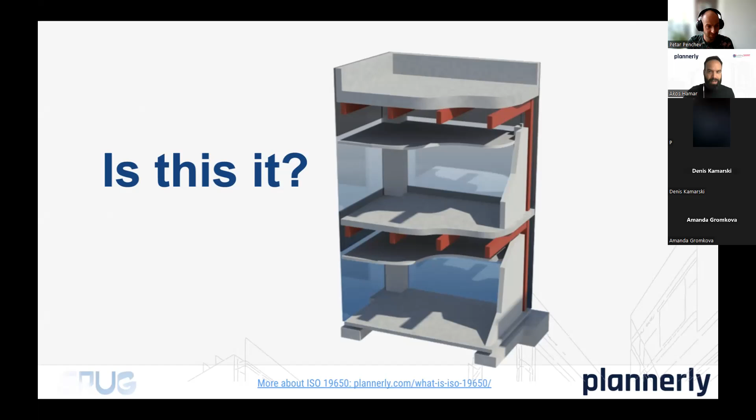What is BIM? What is BIM for you? Quickly going through it, because we have another article which talks about BIM for your grandma. How would you talk about BIM for your grandma? Maybe these are images from that article, not necessarily meant for you. But the question is, is it BIM? Of course it is BIM, but then is it another BIM? Is it better BIM? Is it worse BIM?

We could go on and show a couple of images with different geometrical aspects, but we can also assume different information going into it, different techniques, different ways of creating models. And if you put different personas on the screen as well, we know that BIM is different for everyone. An architect understands the BIM challenges in design development differently than, for example, an owner who is requesting the BIM. And that is what we believe is a main challenge to start with, because we are still not necessarily speaking the same language.

So a requirement coming from an organization for whom BIM is not their daily business, conveyed to an architect who is doing design using BIM software and technologies, then of course there is a gap in between and potential misunderstanding.

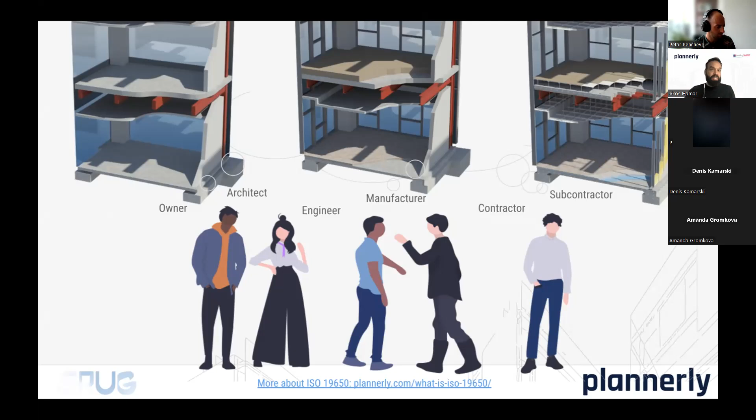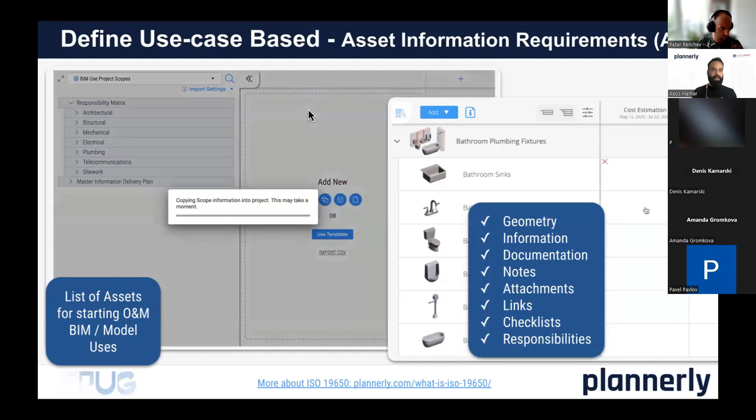That's the text-based portion of the tender process we are going through. We can also talk about building information modeling, which is an object-oriented database in the end, so we can talk about structured data and requesting information in a structured manner. For that, we are creating these responsibility matrices.

In such matrices, we can start requesting information for the given use cases. Because we are at the very beginning of the process, we can talk about our project on a higher level, on the different assets we are going to request, and start assembling the asset information requirement documentation. This is now more of a table structure where we can put all our requirements in a hierarchy and list the different use cases, if we have different use cases that we want to think about from the very beginning of the project.

We can stay on a very high level because remember, we are at the very beginning of the process, but important pieces of information that we are going to request, important aspects can already be discussed here, even going down into the details of information requirements. What are we going to expect for sure from the project at a given point in time?

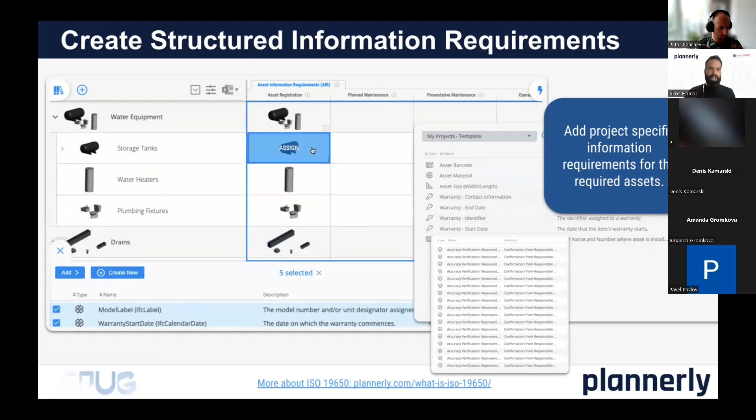So talking about the tendering process, we have our requirements and we can start inviting our collaborators. We have a nice function in the platform to invite teams, prospective teams, who don't see anything except the documentation that you share with them. So you can have multiple prospective teams - it really supports a tendering idea. In the end, they send back the information to you in the same structure, so you can compare apple to apple - really easy to decide who to work with.

So that was very quickly finding out that you need the project, creating it as an appointing party. Maybe it's not relevant for everyone - if you are a supplier of information, a designer, in a perfect world you should be receiving these invitations for tendering. But if you are representing an appointing party, a customer, these are the documents that are going to be put together in the very beginning to create the EIR, which in the end is going to be the invitation to tender.

In the next step, we assemble together a tender response and go through the appointment process. The tender response is the main document we all know as the execution plan. In the execution plan, we answer the challenges, questions and requirements that we received in the EIR documentation, and start adding more information into it, like mobilization - how are we going to mobilize our resources, human resources or software, hardware? How are we going to fulfill the requirements? Also, what kind of risk can we identify, and how are we going to mitigate those risks? So that's our tender response.

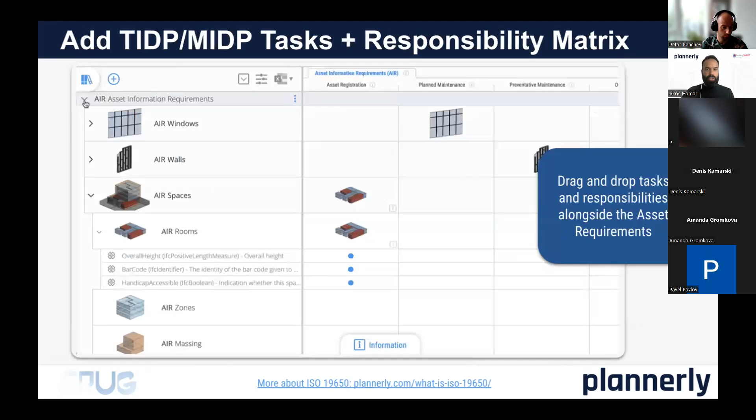You've already seen this kind of table user interface - that's our scope module, where you can start detailing out who is doing what at a certain point in time, for what kind of reasons. So another motto that we have: the right BIM at the right time, by the right people, for the right reasons. That's what we create here - the right requirements, really making sure everyone understands why we are doing BIM, how this BIM is going to be used downstream. And we can really talk about all the details needed - about the geometrical needs, about responsibilities, about information requirements, and so on.

Maybe it's a better picture about that - so we are going to create information containers that really call out all the details, and templatized in a manner meaning that you have a template you can reuse from project to project, but also customizable on each and every project, so you can really agree with all the project stakeholders about the principles.

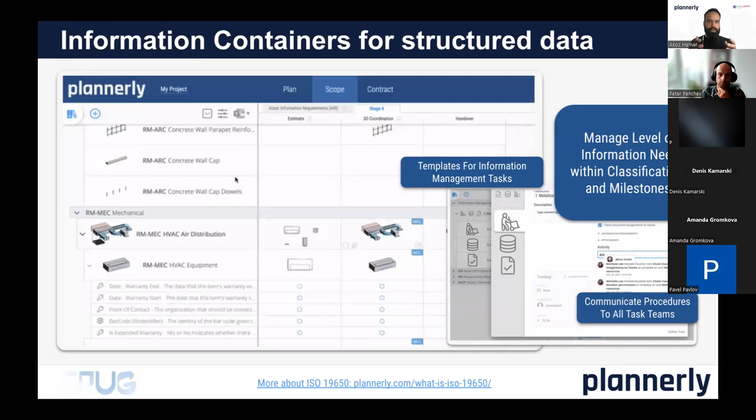I want to pause here for a second and just try to reiterate and rephrase what I'm saying, because I stated that one of the big problems we see in the industry is miscommunication - not necessarily understanding what is needed for a project, not necessarily understanding why we are doing information management or BIM on a project. In many cases, we also see that the appointing party is not necessarily in a position to fulfill their role - they have different business objectives, different from running a BIM project. Therefore, they might be challenged to be requesting the right information. And if that's unknown, if they cannot request the information for the purpose, then of course the suppliers, the designers, the contractors cannot deliver that information.

So I find this part very crucial. I believe we could spend all day just discussing it. This is the crucial part, to make sure that everyone really understands why we are doing BIM, how it is going to be used, and who has to deliver what at a given point in time. After that, it's a piece of cake to create a contract out of it.

Again, assuming we use Plannerly, we have some preset outputs that you can rely on, even having e-signatures in the application. So if you follow a formal process, you can even get as far as getting electronic ink on the paper and have a green light to get started.

This was whatever I told about, the creation of the agreement. Again, I cannot emphasize enough how important it is. Once we have these agreements, we can jump into the collaborative information production, so to the modeling pretty much.

When we do that, we probably want to agree on timing. So creating a Gantt schedule, as we typically do, or any kind of timing approaches or plans, can be done using Plannerly. There is an easy way to do that, because each and every requirement that you created, each and every information container, is translated into a task, which can have a dependency and a duration. So you can really start scheduling the activities.

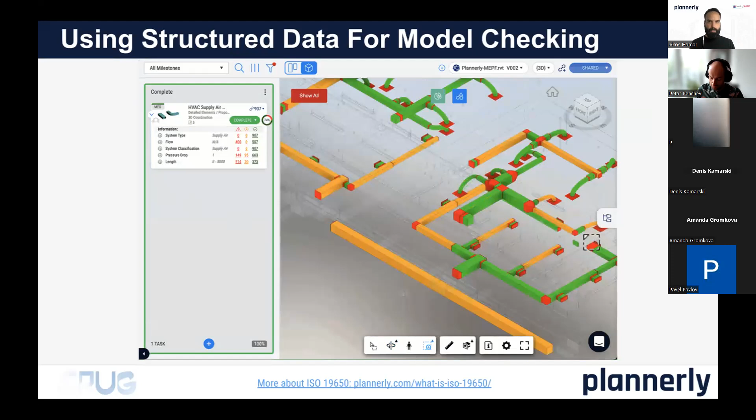I was talking about structured data. Structured data is again key in our BIM world. This structured data is created as a starting point inside of Plannerly, but doesn't stay inside of Plannerly, because otherwise it wouldn't be a great help. There are lots of tools out there that you are using for creating information.

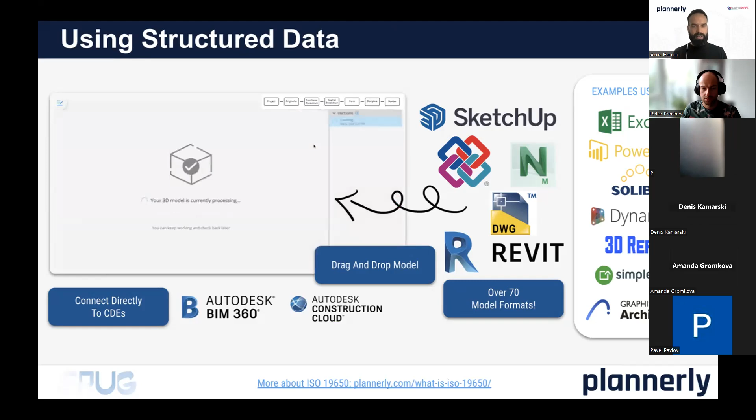Talking to a Revit group, most likely your preferred solution is going to be Revit. But if you want to visualize with Power BI or other tools, or do quality checking in different tools, you have to hand over the structured data for the next process step. We can do that in different ways, but one way that's taking off is relatively new—I think it was officially announced just a month ago or so, even though it's been in development for a long time now.

That is the Information Delivery Specification, the IDS in short, coming from Building Smart. IDS defines how information has to be delivered. It's supposed to have a human readable version.

Something like our scope module where you can very easily communicate the requirements, but it does have a machine readable version as well. That's what we rely on at Plannerly, creating from your scope requirements a machine readable XML format that is sent out to all these different parties.

It's going to be used for either information creation or quality checking purposes outside of Plannerly. I will show you an add-on for Revit, because we have an external company in Germany developing an add-on that can capture the IDS coming from Plannerly and then create all the shared parameters in Revit. It really semi-automates, preparing everything for the user as much as possible to create good content without having to look around in different places to understand what the requirements are.

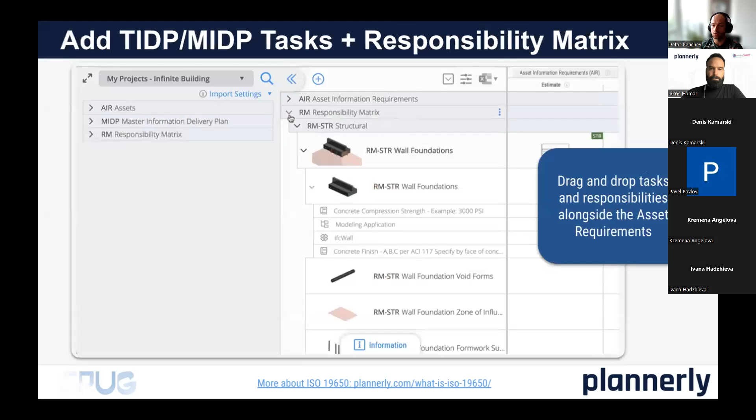So your best advice would be to explain everything in plain text. If we look at this through the prism of Revit, each element that needs to be modeled, or each category, should be listed, and for each category you should explain what's the level of information and level of geometry development that needs to be achieved. So there's no universal way - you should explain for each element how developed it should be, right? Something like that, yeah.

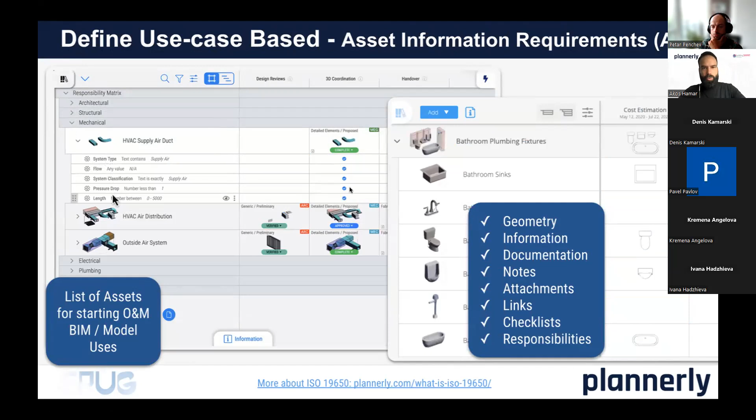So what you see in the background, that repeating short video - let me know if I can open it up bigger, which I will do. Let me leave the presentation slides and go to plannerly.com real quick. A website I would recommend to visit, join free, take a look at our resources, training, and so on. I'm going to go to the demo because there are some videos I'm not going to bore you with, but if I scroll down a little, I want to answer the question about explaining our needs.

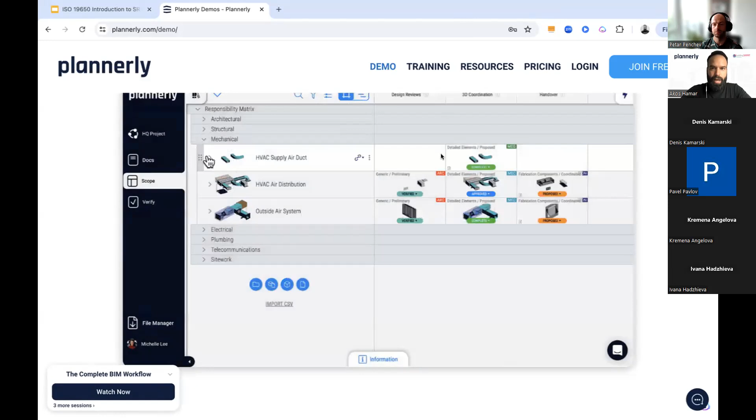Explaining the needs, especially when it comes to a level of information requirements, there is a trend - it used to be an LOI 2 or LOI 3. And what is that? Really not described. So for us, in the end, it has to be a Revit parameter anyway. What we believe in is to request that parameter from the very beginning, to define the different use cases.

So that's what you see on the horizontal axis - let's say I'm going to do a design review, a 3D coordination handover. It could be anything - quantity takeoff, scheduling, whatever you name it. For each and every use case, you might need different information. Different receiving applications are going to use the information, therefore you have to add something more and more potentially. But it has to be a Revit parameter anyway.

So why not define that requirement instead of saying it's an LOI 3 - defining the requirements in plain language. That's the information requirement you can see here, and then you can start requesting that for that element, for the given use case, I need this information. Now it doesn't have to happen on each and every project - you don't have to define it each time. We believe in using templates, as I mentioned earlier, so creating such templates is going to be reused from project to project and will define the requirements.

This is exactly what is going to be sent out into information delivery specification XML format that you can read in Revit, so you don't have to recreate the same thing in Revit because it's going to be there for you. And the same applies to geometry. Now you see the detailed elements as a geometrical requirement and proposed reliability. I cannot click on this one now because it's just a video, but if you click on it, you get a larger view better describing what it actually means. These are scales that let you move both the geometry and the reliability needs. This could be replaced with a number, but again, I'd suggest rather going with the textual plain explanation.

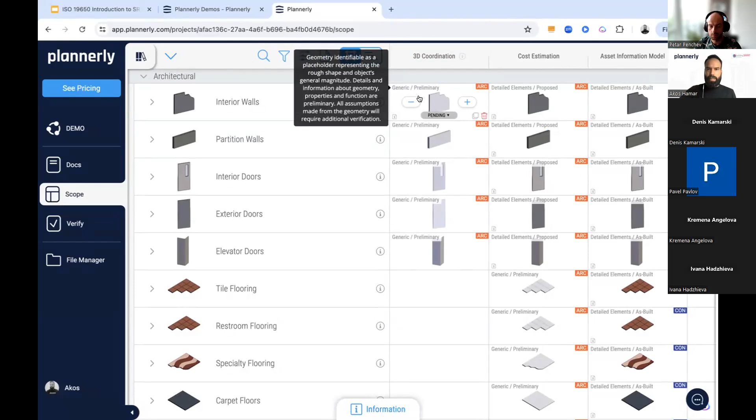I could change the setting, but it says something about the geometry. With the plus and minus signs, I can change it, and it suggests that there is some different information needed. If I click on it, yes, it is text information that will describe how to model, but we are putting it in a certain structure.

So the geometry is a combination of geometry and reliability, and you see it's a scale going from symbolic - you mentioned a box representation, for example - going to as detailed as a fabrication component. That's when you really start having the bolts, and there are steps in between.

The same applies to reliability. So from very early, not reliable at all, to as-built, and even defining the accuracy of that. So these two scales give you a structure to communicate the needs.

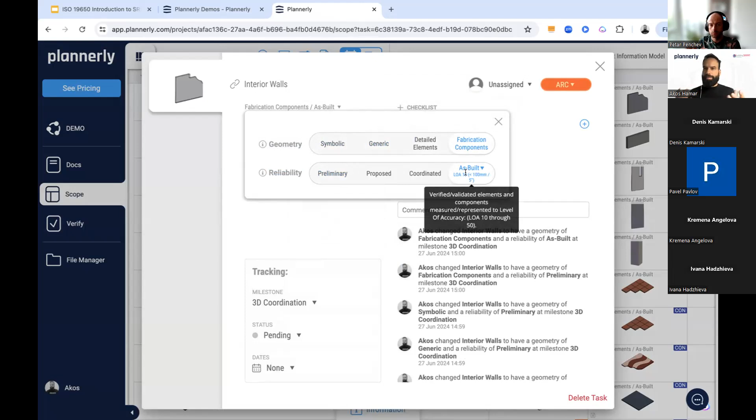You can find all the use cases. Like if you are in urban planning, just designing a mass of how a building is going to be placed, it's just a symbolic representation of a huge mass. But the accuracy has to be really at least coordinated, because you are talking about the space that you are going to use and the edges, and you have to meet the urban space requirements and so on. So that's one way.

Then you have the description. Maybe this is a place to describe your needs, and also we start having checklists as well. So an example that I see right away in my checklist is: all the stairs in this example have to be connected to the floors. That's something that I'm going to check.

But you could start adding anything like a 'not to model below' and so on. So this is a little bit more structured way of requesting data. Still, it's text information that you are going to enter there.

I was also wondering, based on your experience, do you know any published standards trying to cover this topic? Because the system you've shown, the geometry and reliability, the level of... can you go back? This one, yeah, the geometry and reliability - this is a system that you developed. You decided to do it in such a way, but it could be done differently. So are you familiar with any standards?

If I can talk about that for a second, we also started putting together something. We were actually invited to host this approach, which was between university and industry players, to start creating - do we have it somewhere here - methods of measurement. So methods of measurement, I quickly added to our project. This is something that you will also find in our templates. It starts talking about these exact geometrical challenges that we are facing typically on projects.

It doesn't cover everything. Moreover, it's an open approach. So if anyone is interested to contribute to that or join this approach, more than welcome.

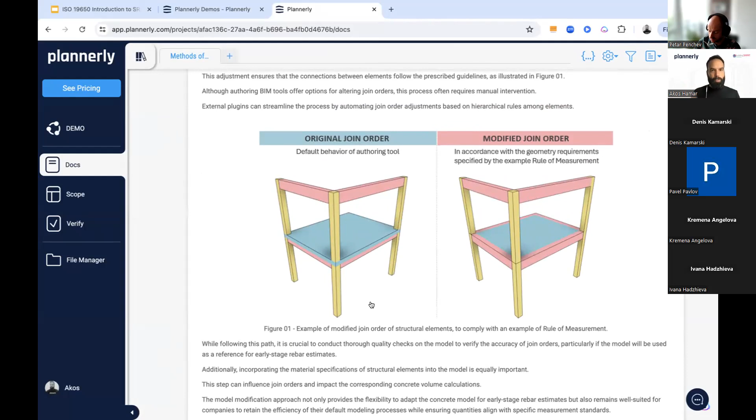So it starts defining how to model things. For the sake of this example, because it's a methods of measurement, we're keeping the quantification in focus, focusing on model creation and geometry from a quantification perspective. Again, this is a guideline, a kind of starting point for debate. But the feedback we get from the industry, from real big names, is that it's a good approach to have. Maybe also answering your question, because there was not a unified way of doing things, and this is attempting to bring everyone closer together.

So 17412, then maybe our guideline as well as a starting point. Okay, thank you very much.

We got another question here in the chat. Are you able to open the chat, or should I? Yeah, I can. I wanted to ask, did you find the question? It's the long one, right? Yes.

I wanted to ask if you feel there are some more neglected document formats that you feel should be pushed more. In my experience, PIR is a bit neglected.

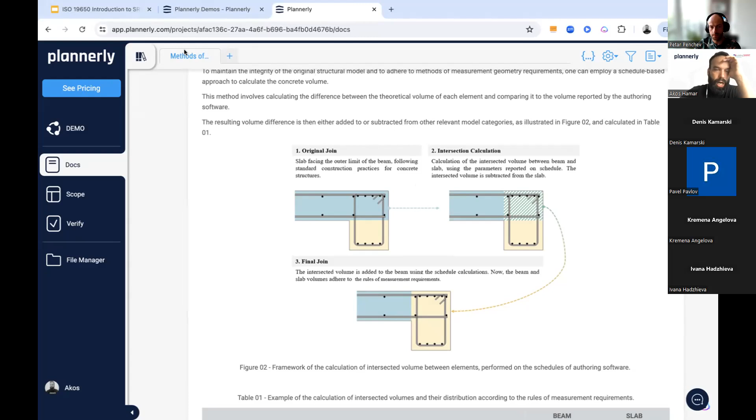I think so. I mean, most of these documents are neglected, that's my personal understanding. So when we talk about the starting document, we talk about the BEP. But the BEP is already an answer for something, which is the EIR. Maybe these two documents are known the most. But in a perfect world, as I showed in the presentation, OIR, PIR, and also AIR are assembling, putting together an EIR. So these documents should be handled by the client, the customer, the appointing party who is asking for the project. In my personal view, those companies are the least educated on information management technologies. Again, they just have a different business focus, not necessarily on digital information creation. So when we talk about ISO 19650, these approaches are going to be brought together, and those companies are also going to be educated on it. So I believe BEP and EIR are well-known, but OIR and PIR are probably neglected.

Also, my personal favorite is the risks document—thinking about anything that can go wrong, and trying to come up already with solutions. So not only start firefighting when it already happens, but especially with some experience and lessons learned, create a document that will help us navigate through the problems. And mobilization is another one. These aren't used as much as they probably will be in the future. ISO 19650 defines the need for all these, so if you go the ISO way, everyone is going to have these documents as well.

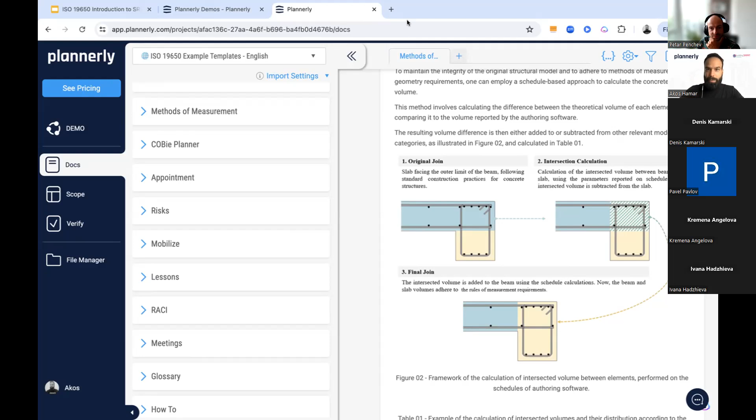So Jordan is not a big fan of interoperability tools, which, yeah, absolutely understandable. Sometimes they are under continuous development to become better and better. And the end goal, I think, is to stop exchanging files and really start exchanging information in the end somehow. So I think that's the rough path we are all on. COBie, we are trying to make it simple—you might be laughing at me, but that's the truth. So if you go to our YouTube channel, I'll show you a video that talks about that, about COBie and Plannerly.

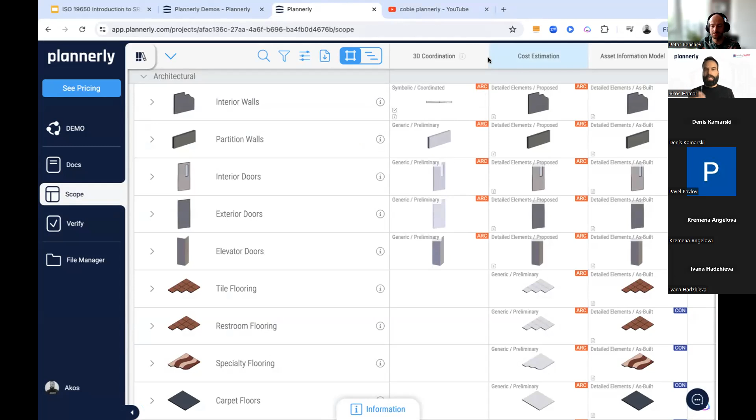This one again was actually another approach when academy—university and industry players—were involved together with us to create an easy to use COBie dictionary library and COBie parameters. I can send you this link, but very briefly, the problem with COBie is that in most cases, people just say, I need COBie. And that's a huge amount of information which is not going to be used in the end. It means a huge administration burden to manage, create, and keep it updated for the ones creating the models, but in the end, it's not going to be used. So what's the purpose? What we came up with is a library that you can find in the application.

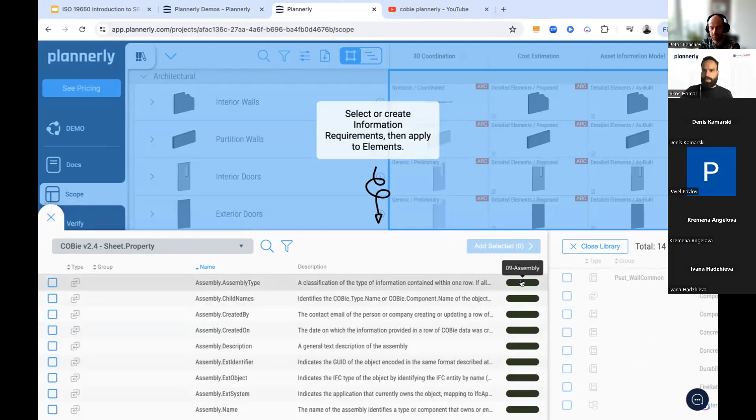COBie library is defined in 3 different ways. I think this is one of the really good ones. The Revit add-on adds the COBie prefix before the COBie parameter. If you take a quick look, it's about putting all the possible properties that COBie defines per sheet.

That's the tags per sheet into a library. We also put a tag on each property from light, intermediate, and full, meaning that if you only need an entry kind of COBie deliverable, you can request the light properties. It selects only 33 properties that you can add to your project. Of course, you can even further refine and be selective, only requesting the properties that you need.

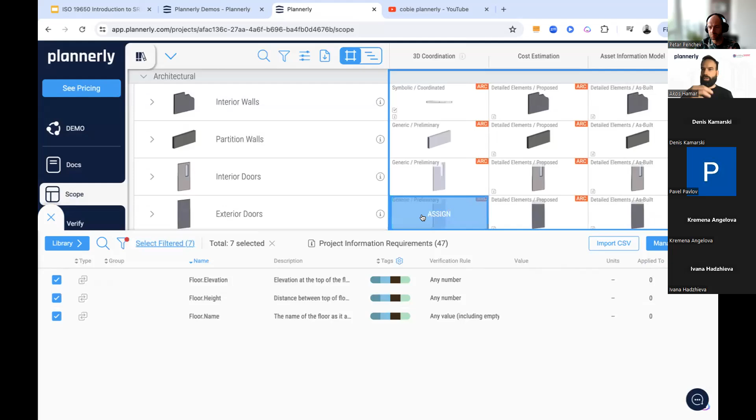Once you have these properties in your project, you can start assigning them in the grid. The idea is that you'd be selective and only request properties that are going to be meaningful for your project. As a bad example, I'm just adding them to my walls, so here are my properties. That's the starting point: requesting information that is relevant for your project and will be used downstream, not every COBie parameter, just the ones that are needed.

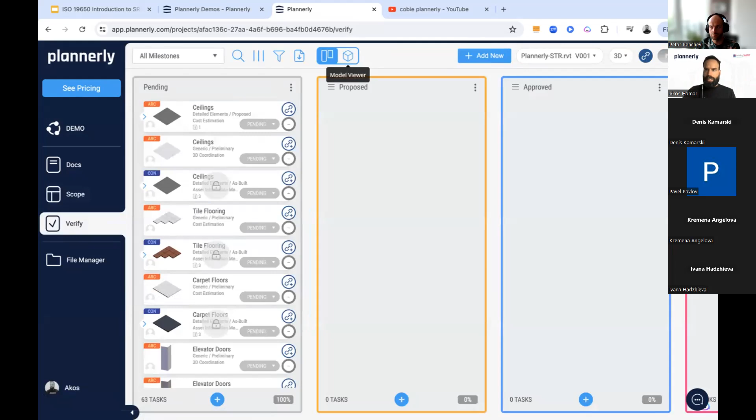Once you start receiving models, we check them inside of Plannerly as well, linking up with ACC and BIM 360. Having the model in the application will automatically fill the requirements, and you can see them already here. So an information requirement gets matched with the modeling property.

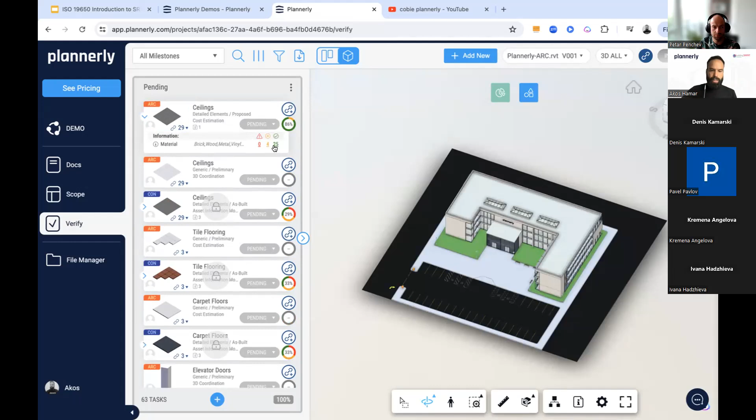We can even analyze the quality, seeing that 25 pieces of the ceiling are good, 4 are not that good. But this is applicable to the COBie parameters as well, so you'll have a quality report about your COBie parameters, whether it's missing, added, good, and so on.

Creating a COBie report can also happen from Plannerly. The handover data report is your COBie report, created based on your model content against the COBie parameters you were requesting. That's our COBie planner pretty much. If you want to see more about it, it's also among the templates, so please take a look. I can also add it to my project and read more about the COBie planner.

What I'd also recommend, because it's probably even better, is to take this video that I'm going to share with you and just watch it. I hope I managed to answer the question.

I think there's a final question here. You could check it in the chat, but it's pretty much about creating digital twins. Digital twins are meant for the operation phase, right? So having the exact digital version of your physical facility to understand its behavior and the different assets requires a good starting point.